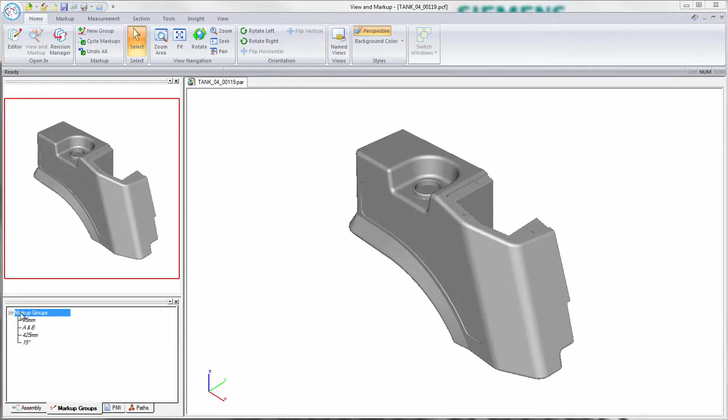The first is to deepen a pocket 75mm for the hanger frame. The next, to bring face A in line with face B. After that, reduce the overall height of the tank to 425mm from the bottom. And finally, compensate for the loss of volume by angling this face out a further 15 degrees.

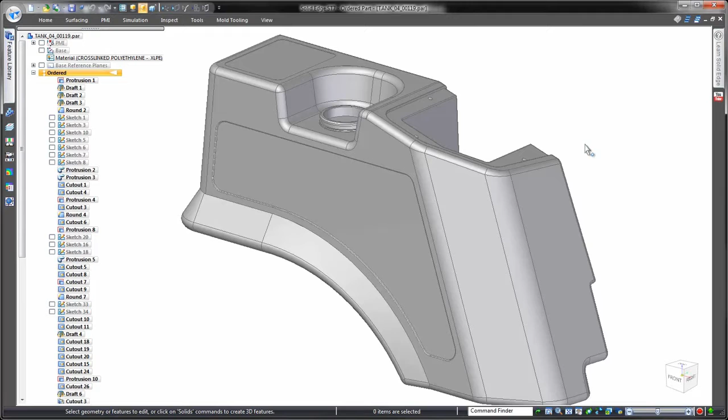Simple. For each change, we'll make the first revision as you would in most any other CAD system, working with the feature tree in a history-based approach. Then, we'll make exactly the same revision using synchronous technology. To help compare, we'll set a timer going in the top right.

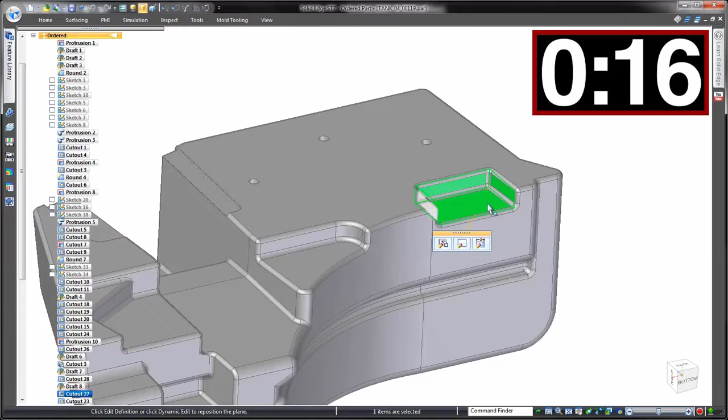History-based approach first. Now, some of these traditional CAD systems do have direct editing techniques, so let's trial that type of tool for our first design change, editing this pocket. No good. Notice that this fails, assumingly due to some downstream features. So we'll need to go back to the history of the model and modify this feature itself.

To save you falling asleep, we'll speed up the video where we can. This is taking time because, as we edit the depth of the pocket, it's clear that another pocket is linked to match it. Design intent automation is usually seen as a good thing, but not when unexpected changes come about, as we have to find and remove that link.

Okay, same change but this time using synchronous technology. Timer restarted, and we'll go through this in real time because it's as simple as placing a dimension in 3D, entering the required value, and notice the other pocket is left well alone.

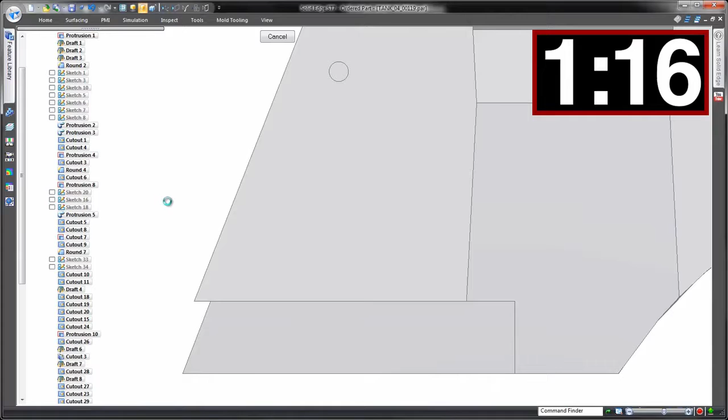Done. Back to a history-based approach for the second change, matching face A to face B. As we edit the top feature holding face A, because history-based CAD is order dependent, the cut below that holds face B doesn't yet exist, so we can't match to it.

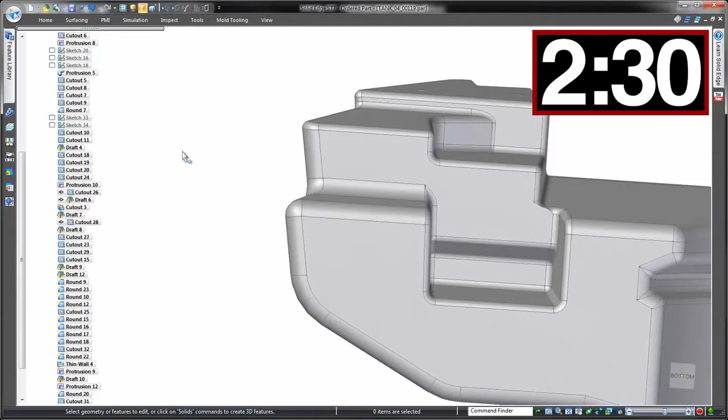Therefore we have to do some drag and drop reordering in the tree so that we can see what we want to match to. Oh, and notice some grey arrows that have just appeared in the tree. They're warning us that there's some kind of rebuild issue. We'll ignore these for now, but ultimately we need to come back and fix.

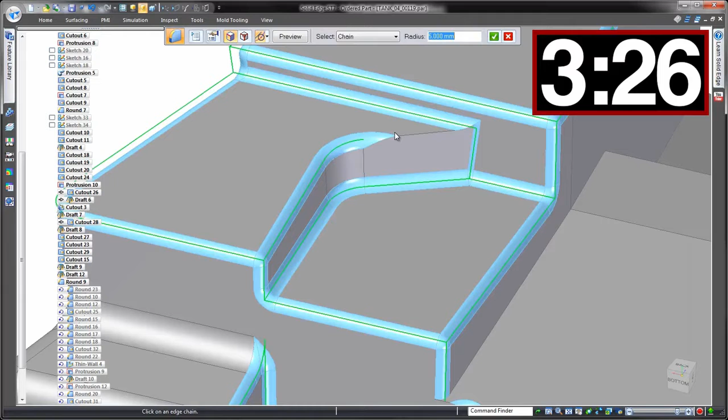The face angles need to match too, so we have to find the relevant feature and edit. Ah, this has had the effect of removing some rounds. Did we edit these rounds? No, but again, as one feature is delicately based on another in history-based CAD, often one change can turn into multiple changes. The clock is ticking.

Let's take a look at how we'd make the same change in synchronous, including the draft. And don't blink or you'll miss this. 1 click, 2 clicks, done.

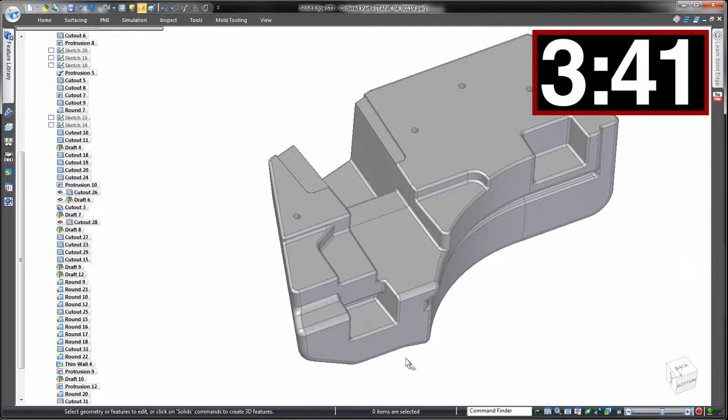History-based approach for the third change to reduce the overall height. We find which feature is the correct one to edit, usually not the most obvious one. A little bit more sketch work required for this change.

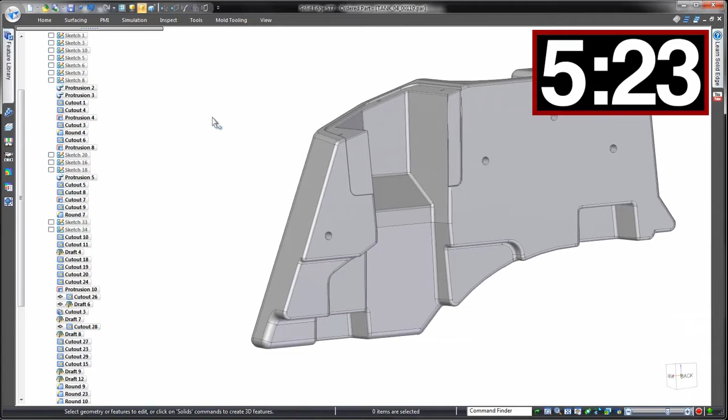Oh, and once again some rounding to fix. Are you still following along? Does everything look okay? Are you sure everything rebuilt 100% correctly? This doesn't look like it used to do.

Time for another fix, but good thing we spotted this before any moulds were cut. Could have been costly.

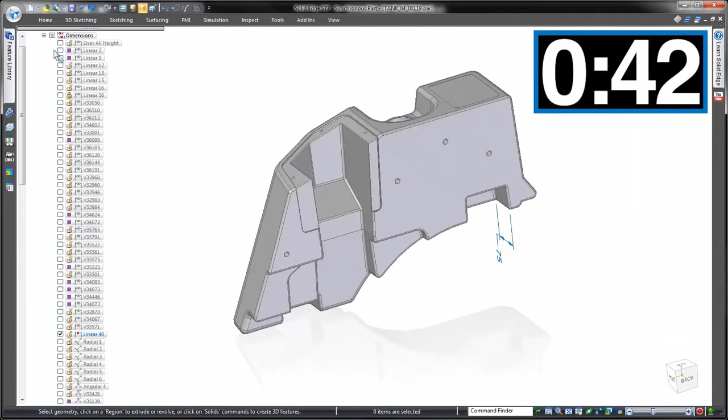Using synchronous technology for that same change, we can make use of any reference dimensions that we placed when we built this as a history-based model, but the difference is they'll actually control the geometry. Choose a dimension, enter the value, and let synchronous technology look after the rest.

One last trip into the history-based approach, we need to increase the front angle 15 degrees to compensate for loss of internal volume from those other changes.

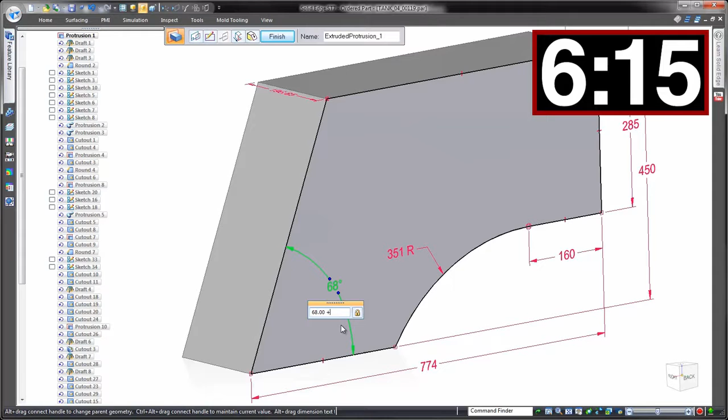Wait for the final rebuild, and wow, we have some big problems. There's a huge gap going through the middle of the part, the mounting holes in the top have also shifted, and some have even disappeared. Oh, and notice the red exclamation marks in the tree of failed features.

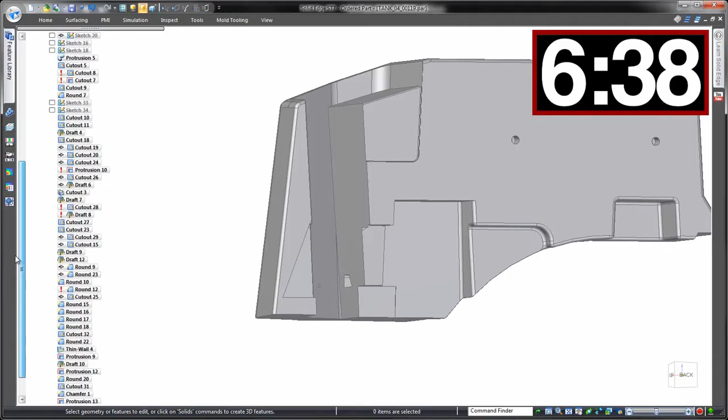We could spend many more minutes or hours attempting to fix this model. Or maybe it'd just be quicker to start again.

And that same final change using synchronous technology, we use what we call the steering wheel for this, our main control in synchronous. We can use this to simply rotate around this round, and we can enter the precise value of 15 degrees.

Done. All sorted, no rebuild issues.

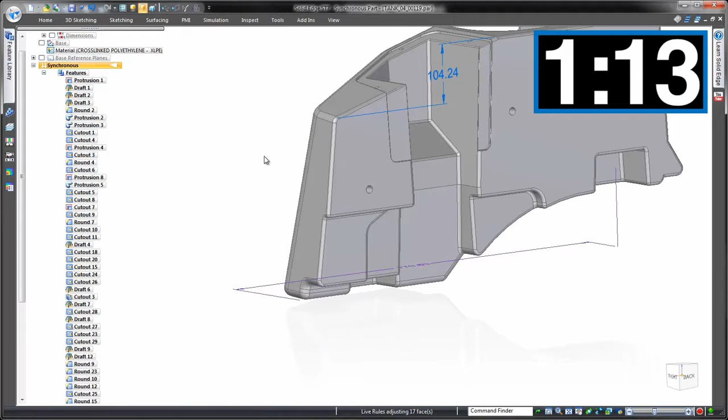So, how did the times compare? 6 minutes 46 seconds for history based, 1 minute 15 seconds for synchronous technology. That's over 5 times faster. Well, even more than that in fact, because remember our history based model still requires work to fix.

And it isn't just a time saver, it's a stress saver too. Keep in mind that this part wasn't modelled wrong, it's just that when design intent changes unexpectedly, issues can arise in history-based CAD. Solid Edge with synchronous technology means you can welcome unexpected design changes, even late in the design cycle. Meet your clients' needs, improve your products.